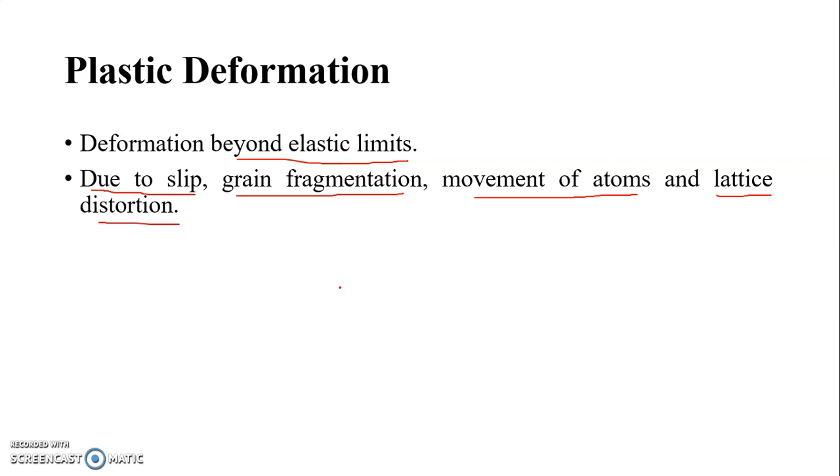These are the effects after the plastic deformation in the materials. The slip can occur and grain fragmentation also can occur. The movement of atoms can occur due to the shear force, and the lattice distortion.

Now the bulk forming deformation. What is bulk forming deformation? If the material is of big size, the thickness of the material is more, or we can say the ratio of cross-sectional area to the surface area is high, then the forming that occurs in that type of material is called the bulk forming process.

These processes involve a large amount of plastic deformation. In this, the plastic deformation is very big because we form the product from the bulk materials to the sheet. So there is big plastic deformation in bulk forming processes. The cross-sectional area of the workpiece changes without volume change.

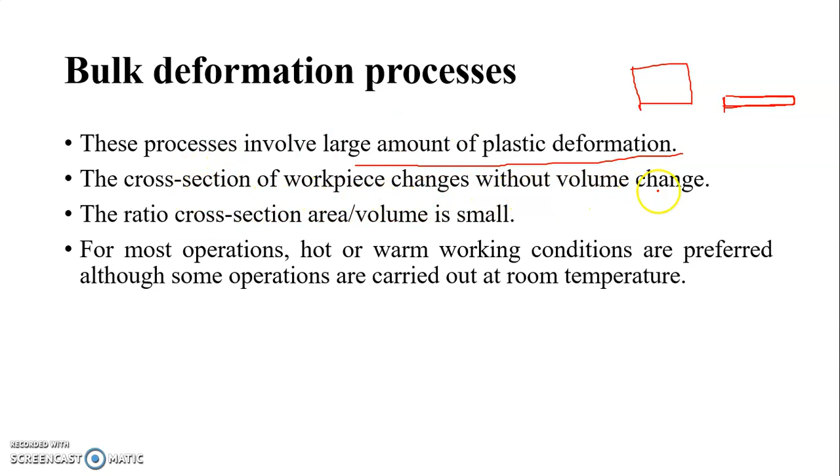Here, if this is the bulk material, we have to make the sheet. Then, for making the sheet, the cross-sectional area of the bulk material will change, and length will increase, so that the volume of the material stays the same. Volume should be the same before and after the bulk forming process. The ratio of cross-sectional area to volume is small in the bulk forming process.

For most operations, hot or warm working conditions are preferred, although some operations are carried out at room temperature also. Mostly the hot working process is preferred for bulk forming, because here the plastic deformation is more. Therefore, we need to work with a hot working process. But for some materials, at room temperature we can also do the bulk forming. Those materials are ductile or malleable in nature.

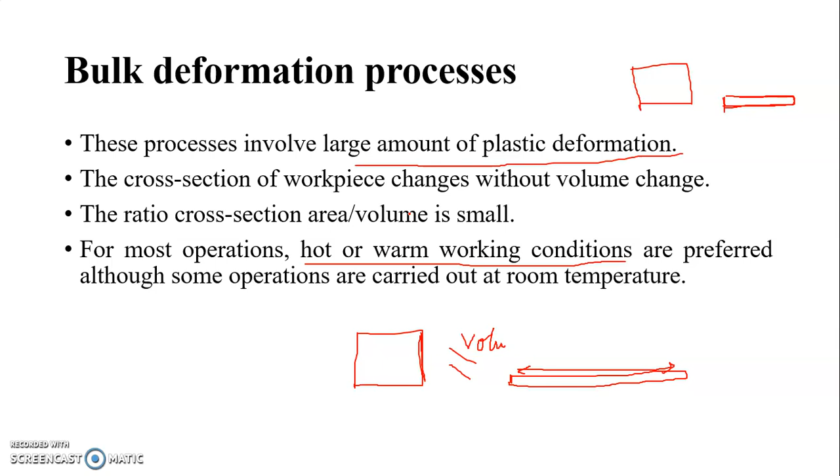Now the sheet forming process. The sheet forming process is done on sheet material workpieces. The thickness of sheet workpieces is very less. Therefore, the work on that workpiece is called the sheet forming process. In sheet metal working operations, the cross section of the workpiece does not change. The material is only subjected to shape changes.

Here, in the sheet forming process, the cross section is not changing. Before and after sheet forming, the cross-sectional area is the same, but here a change of shape occurs in the workpiece. We can bend the material, we can punch the sheet material in the sheet forming process. The ratio of cross-sectional area to volume is high in the sheet forming process.

Sheet metal working operations are performed on thin sheets which are less than 5 mm, or we can work on strips also, for making a coil of the metal, by means of a set of tools called punch and die on a machine called a stamping press. They are always performed as cold working operations.

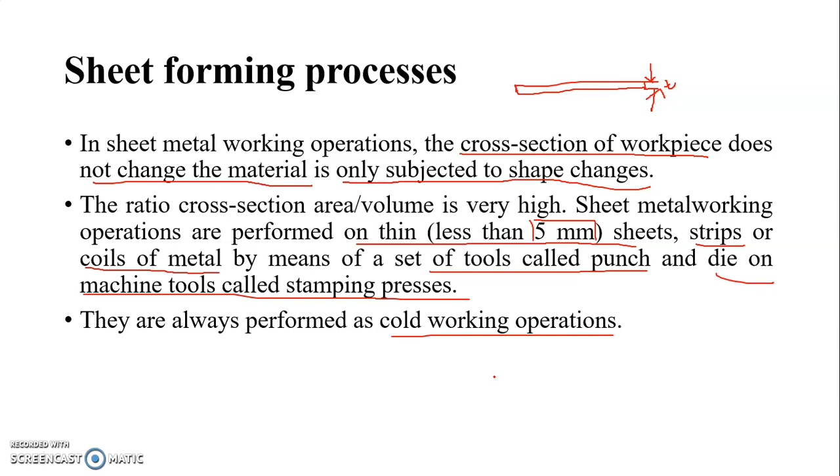The sheet metal forming processes are always performed as cold working operations, because here the plastic deformation is less and the shear stress is high. Therefore, we don't need a hot working operation here. We can perform it as a cold working operation.

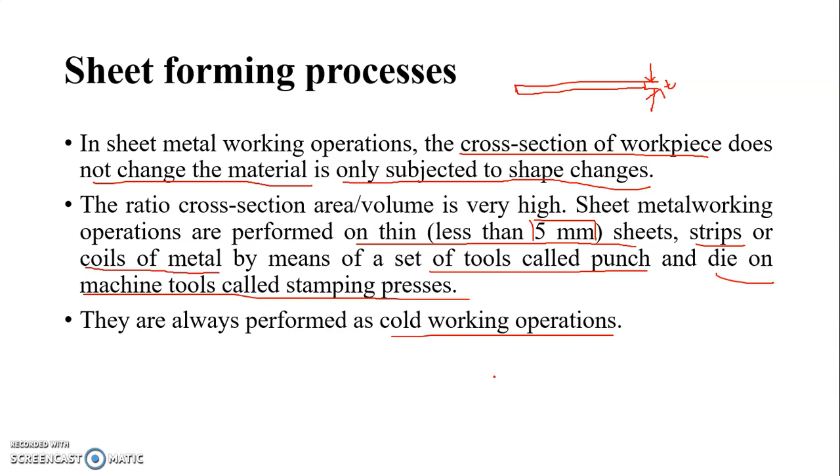Now strain hardening. What is strain hardening? When the metal is formed in the cold state, there is no recrystallization of the grains. Thus, the recovery of the grain distortion or fragmentation does not take place. Strain hardening is done in the cold state. Therefore, we can say it is a cold working operation. Strain hardening is done for increasing the strength of the material.

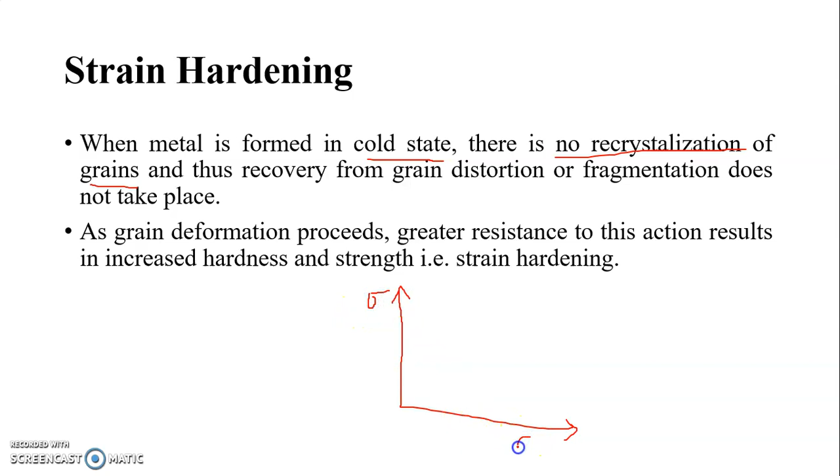As we can see from the mild steel stress-strain diagram, with stress on the y-axis and strain on the x-axis, this is a stress-strain diagram of mild steel. So strain hardening is done in the plastic deformation zone.

So here in this diagram we can see this is the strain hardening zone for the mild steel. This is the yield point. After the yield point, plastic deformation occurred. After giving the load to the yield point, strain hardening occurred in the material. After that, at this point, the strength is maximum. Therefore, we can say that through the strain hardening process, we can increase the strength of the material.

Here there is no recrystallization of the grain. There is no recovery of the grain distortion, and there is no fragmentation in the material. The grains here are losing their properties. Here shear stress occurs after strain hardening in the grain boundaries.

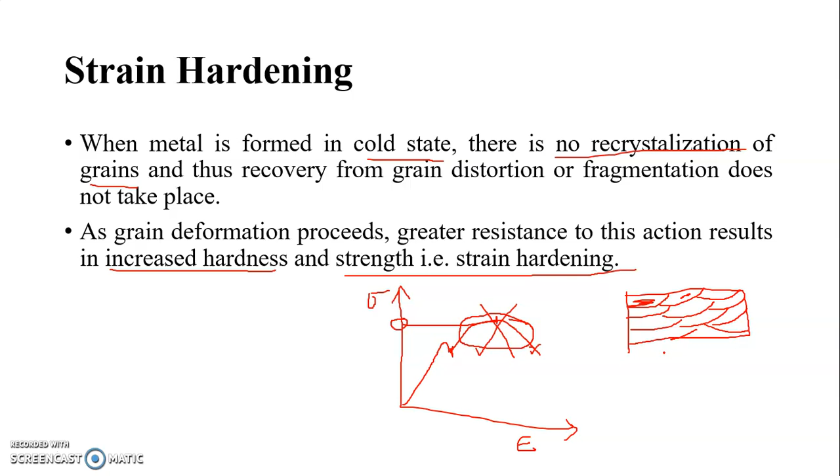As the grain deformation proceeds, greater resistance to this action results in increased hardness and strength, that is strain hardening. In strain hardening, the hardness of the material is also increased due to the irregular size and shape of the grains in the material. We can improve properties like toughness through a further hot working process, but in the cold working process there is no fragmentation or recovery of the grain. Therefore, here the hardness and strength of the material increase.

Now, recrystallization temperature. What is recrystallization temperature? It is the minimum temperature at which complete recrystallization of the cold worked metal occurs within a specified period of approximately 1 hour. This is the minimum temperature of recrystallization, at which recrystallization of the cold worked metal is completed. After this temperature, after recrystallization, the worked metal is called hot worked metal.

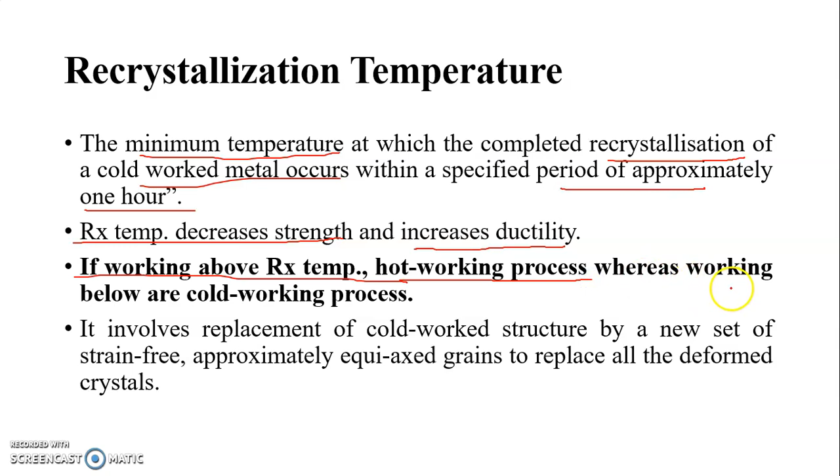Recrystallization decreases the strength and increases the ductility. As I discussed in the previous slide, if we increase the temperature above the recrystallization temperature, there is recrystallization of the grains, with recovery and fragmentation in the grains, so that after recovery the ductility of the material increases, but we lose strength in the material. Working above the recrystallization temperature is called the hot working process, and working below the recrystallization temperature is called the cold working process.

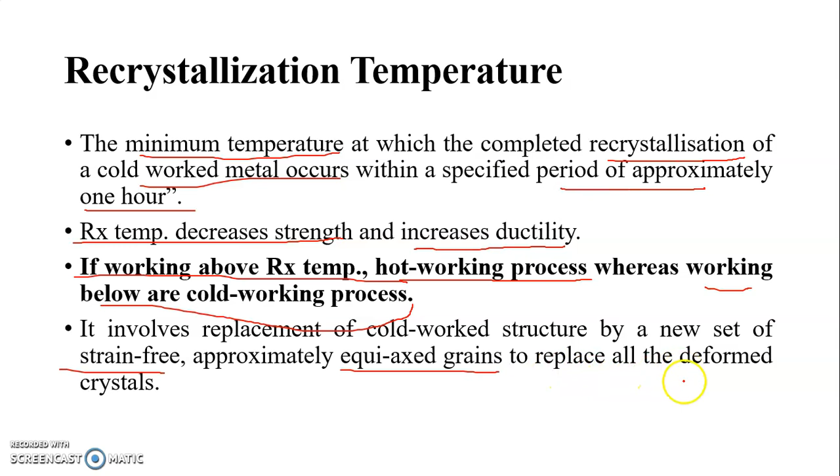It involves the replacement of the cold worked structure by a new set of strain-free, approximately equiaxed grains to replace all the deformed crystals. Recrystallization temperature depends upon the amount of cold work the material has already received. The higher the cold work, the lower the recrystallization temperature. Recrystallization temperature varies from 1/3 to half of the melting point. For pure metals, the recrystallization temperature is 30% of the melting point, and for alloys it is 50% of the melting point temperature.

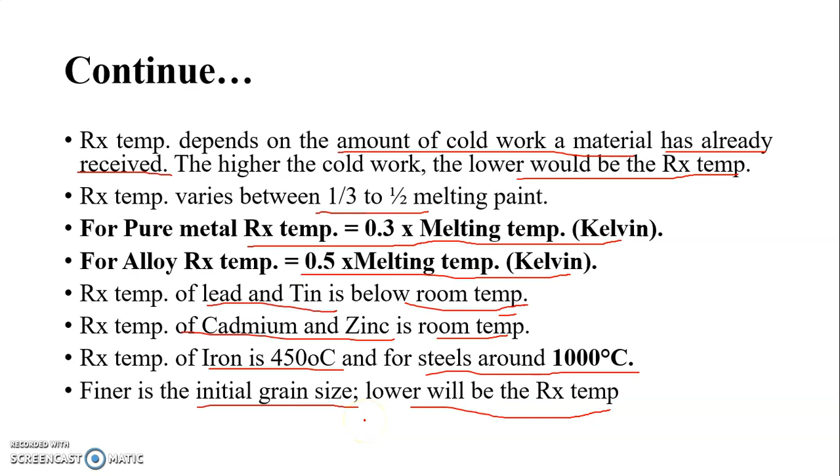The recrystallization temperature of lead and tin is below room temperature, and recrystallization of cadmium and zinc is at room temperature. Recrystallization of iron is 450 degrees Celsius. For steel it is around 1000 degrees Celsius. The finer the initial grain size, the lower the recrystallization temperature. If the grain size is fine and small, then the recrystallization temperature of that material will be low.

Now grain growth. What is grain growth? Grain growth follows the complete recrystallization of the material left at the elevated temperature. If we work above the recrystallization temperature, there will be recrystallization of the grains, so grain growth occurs after recrystallization or after a hot working operation. Grain growth does not need to be preceded by recovery and recrystallization. It may occur in all polycrystalline materials. In contrast to recovery and recrystallization, the driving force for this process is the reduction in grain boundary energy.

In practical applications, grain growth is not desirable because the material loses strength. Incorporation of impurity atoms and insoluble second phase particles is effective in retarding grain growth. Due to grain growth, we cannot get a precise material. In a hot working operation, there is no precision of the work. Therefore, we prefer the cold working operation. Grain growth depends very strongly on the temperature, on the recrystallization temperature. If we work above the recrystallization temperature, there will be grain growth.